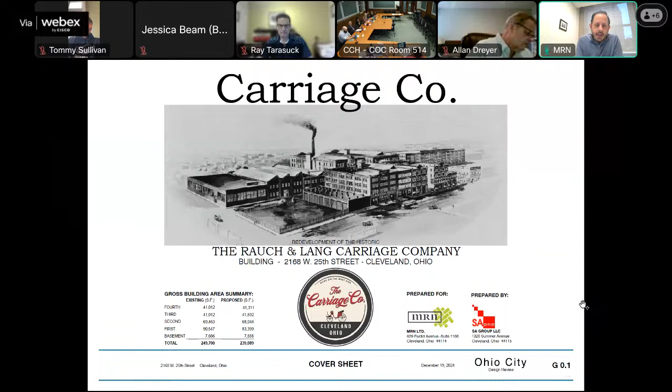Thank you, Jessica. Good morning, everyone. My name is Joe Del Rey. I'm with MRN at 2168 West 25th Street. This is our return visit to look at the windows and doors for the Carriage Company. Earlier in January, we presented the project as a whole, which is our proposed redevelopment of the Rauch and Lang Carriage Company factory located between West 25th and 26th, between Chatham and Monroe.

We have been working closely with the federal and state historic offices. We have been awarded federal and state tax credits, and the project, as designed by SA Group, who is joining me on the call, has been done in a manner to meet the requirements of the historic offices.

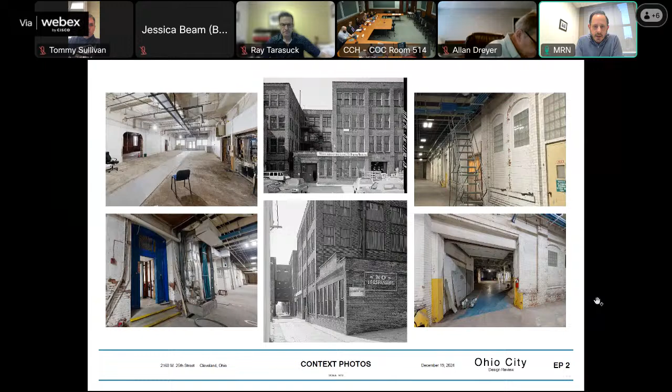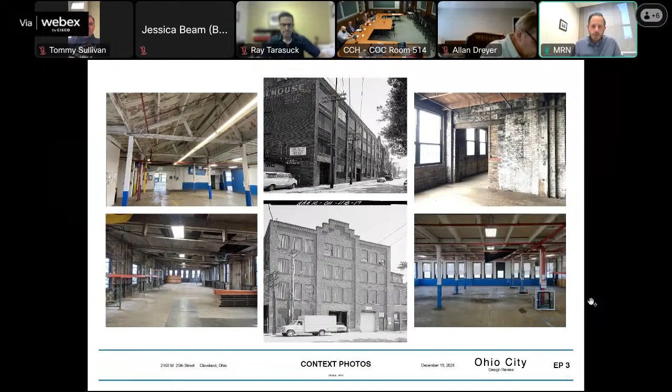Again, as a revisit, I want to include some pictures, both of the existing conditions now and of the historic nature of the buildings. Everything we're doing has been in line with honoring and respecting the historic building facades, window details, and entryways. The board gave us a certificate of appropriateness, I believe, extending to everything but the windows and doors last time, so I wanted to come back and present our plan for window and door replacement as they will occur.

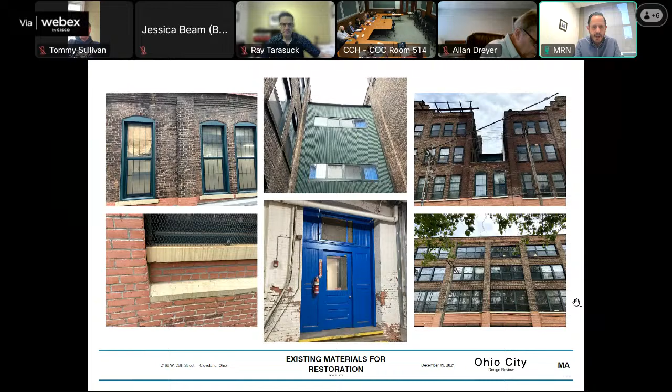One of the big features is, as I mentioned, that we're working with SHPO. We recently, about 6 weeks ago, went back to them with our amendment to the approved plan. This is a presentation that Larry Divita from SA Group put together. Larry, I'm hoping you could briefly touch on the next 4 to 8 slides, talking about the distinction between the blue, the red, and the green highlights, and why they're relevant to the committee presentation today.

Thank you, Joe. Good morning, everyone. So there are 3 colors here. The blue is existing windows, existing today. The red is what was approved by SHPO, and the green is the proposed changes to things.

So if you look at the bottom elevation, the proposed, you'll see that quite a bit of the windows and doors proposed for this project are existing, meaning that we're not touching them. The existing is mostly replacement windows from the early 2000s, and then what we're doing is adding and sort of fixing windows around the project.

On this project, there are over 700 total openings, and basically the replacements for windows is about 75, so roughly 10% of the windows. The majority of the windows facing the 4 public sides, being Chatham, 25th, Monroe, and 26th, are existing to remain at this point.

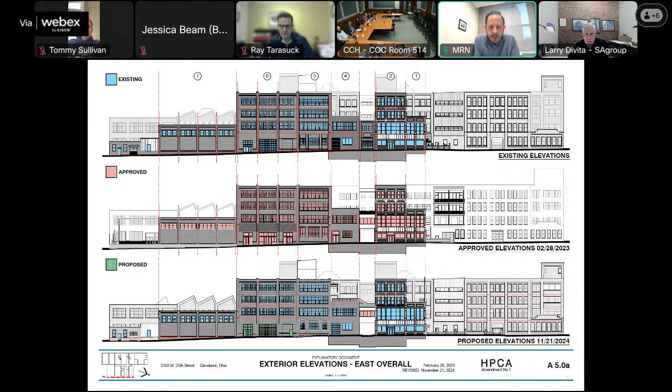So in summary, as we go through these slides, if you see a blue highlight on the elevation — in this case, the West 25th Street elevation of the buildings fronting the street — if it's blue, it's existing to remain. If it's red, it's a window that has been previously approved by the State Historic Preservation Office. And if it's green, it's our way of indicating an opening that had been approved, but we're asking for a change or for them to honor the condition as it is. We'll show those changes as we go through the project here.

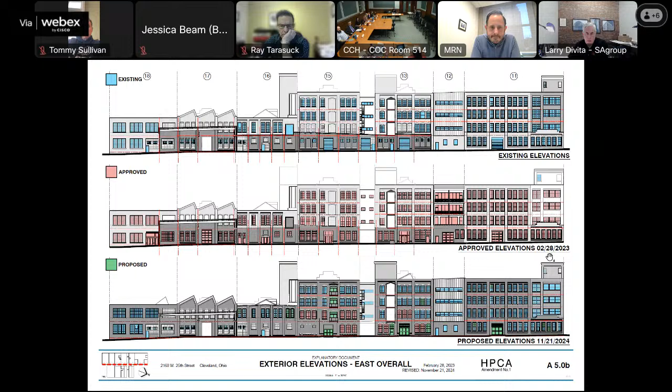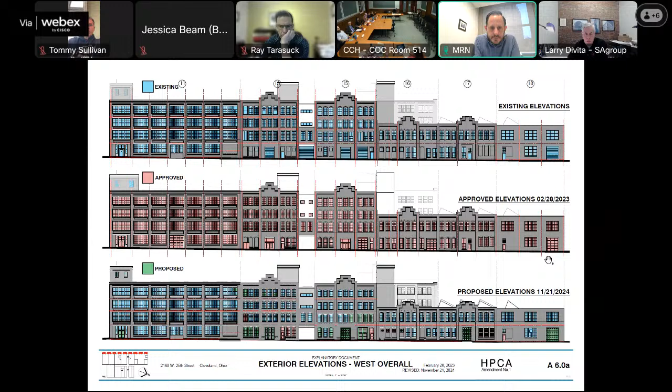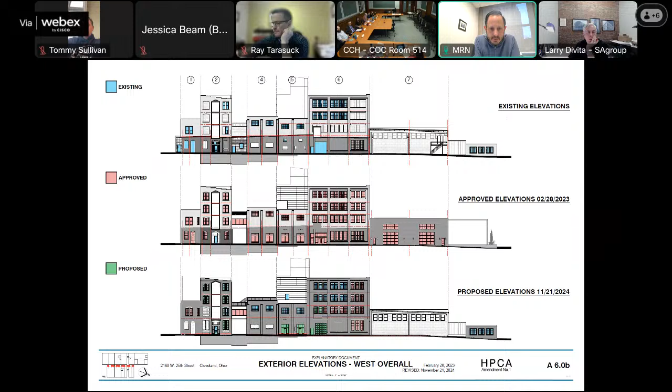This is the view from Monroe. Again, blue indicates existing to remain. Red are approved through SHPO back in 2023. Then we'll show that window in a little bit. If you could advance again.

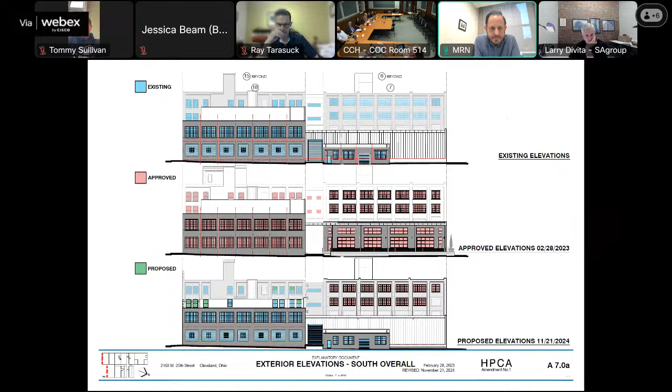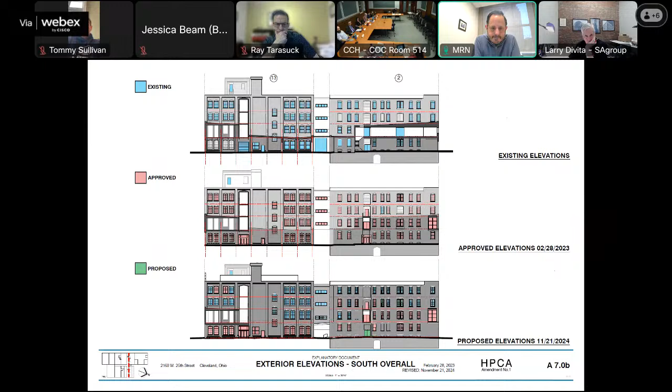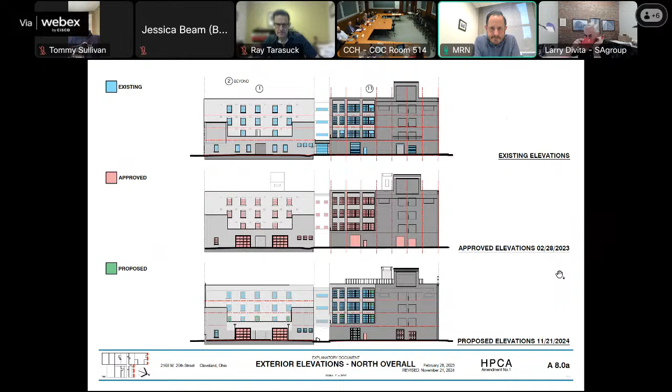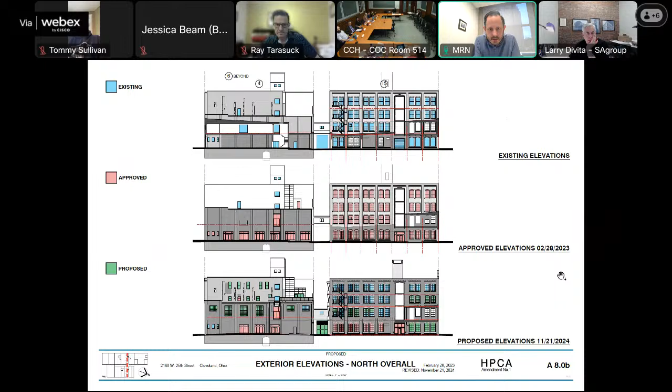Here is our south elevation from the opened up Hancock alleyway. Now we're turning around and facing — I think this is on Chatham here, looking south. This is the north elevation. Sliding in here, this is the alleyway, still looking south, the north elevation from the opened up Hancock.

This next page I included, and Larry, I'm hoping you could speak a little bit about this. This is a page from our submittal to Building and Housing for permit, taken directly out of our submission package, and this speaks to the window types as they are envisioned for when we do need to replace the windows themselves.

Basically what we're looking at is what we've identified as five types of windows. Type 1 is new sashes in existing frames. So in this project, there are some windows that are incomplete — they had insulated metal panels in them for various mechanical reasons, air conditioners, vents, those kinds of things. So basically what we would be doing is replacing just maybe half the window, new sash to match the existing glass.

Type 2 is new windows to match the existing replacement windows that are in the project. That is by far the largest majority of these, where there's an elevation that has quite a few of the existing replacement windows. We are just matching those.

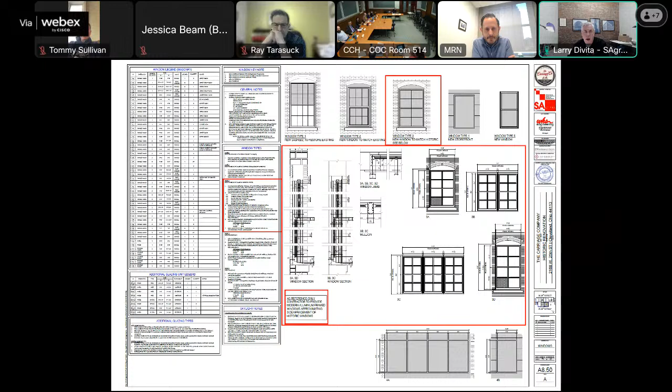Identical windows to match the existing replacement windows. So that you have a uniform appearance on the exterior of the building.

Thank you, Larry. Again, this is the second page of that package, looking at storefront doors as they will engage on the street level.

Just to remind everyone, we're not presenting for the retail today as a part of this initial build. So the only door openings that we will be engaging with are either for our residential lobbies, or for stairwell entrance and exits, as well as for the leasing office.

So what you see at the bottom of this page are the specifications for any doors or doorway entrances that have to be either replaced or maintained.

As we go into the next few slides, I'll be speaking to three chief types of windows, as well as specific door openings, because I think these—as Larry mentioned, there's 5 types of windows. Well, one of them is a sash replacement. So I want to really focus on where we are actually replacing full windows.

So window type 2 is a Traco window to match the existing windows that were replaced. These are the ones from the early 2000s, right, Larry? Correct. So where there is a window on the upper floors that was replaced in the early 2000s, we would be replacing it with that same Traco window to match.

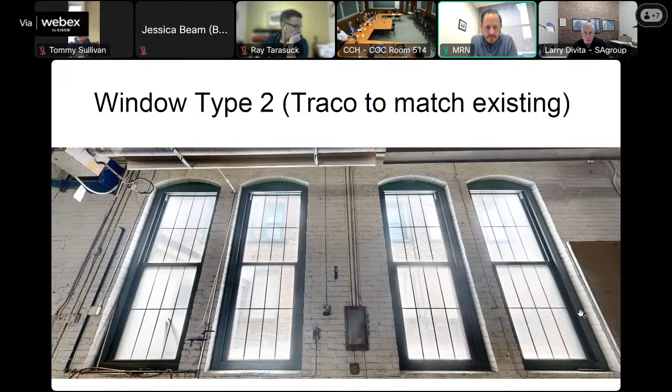This picture at the bottom of the slide is the existing condition. The next slide has the shop drawings. Oh, this is the interior of that same window there. So you can see how they exist both inside and outside. And then as we go through the slides, these are the shop drawings for those windows.

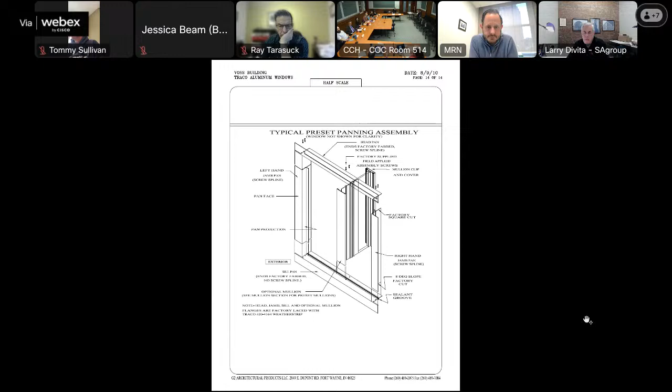So thanks, Carl. So the window type 3, now this is a new window. This is a Wojan window, and this is being proposed for the openings where we have actual historic windows that were not replaced by the owner in the early 2000s. These are a window to match as stipulated by SHPO. And again, these are the shop drawings for that window replacement.

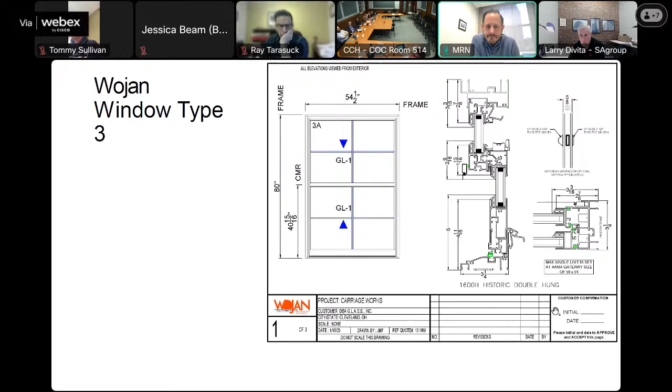Finally, window type 5 is the Kawneer window. These are the windows that we are adding, or where we have to add openings that were not traditionally historic openings. These are the ones that Larry mentioned. We were directed not to try to make it look historic. These are new openings, and so this is a newer window.

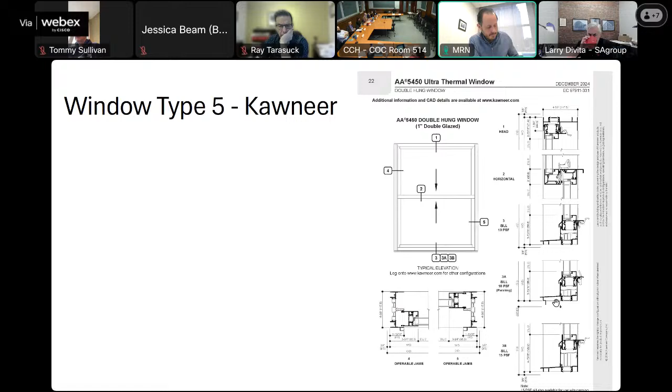In a couple of seconds, I'm going to show everyone where these windows will occur at. And Carl, if you can slide through, these are the shop drawings for that window as well.

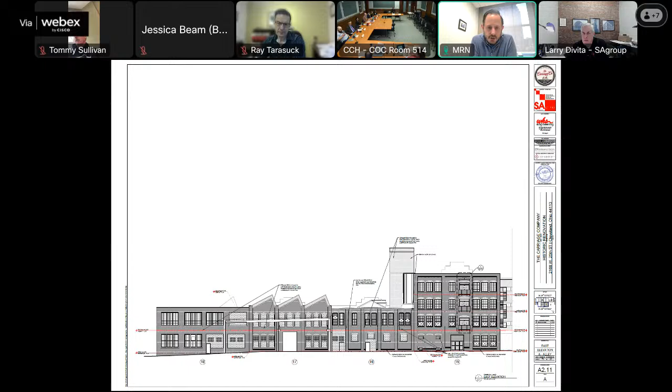All right, so the final few slides of the presentation are going to get into both some boring images and then some more lively images. The next couple slides simply are our demo package, calling out locations where windows will be removed and replaced. This is very similar to the earlier slides that we looked at. Carl, if you could slide through these here.

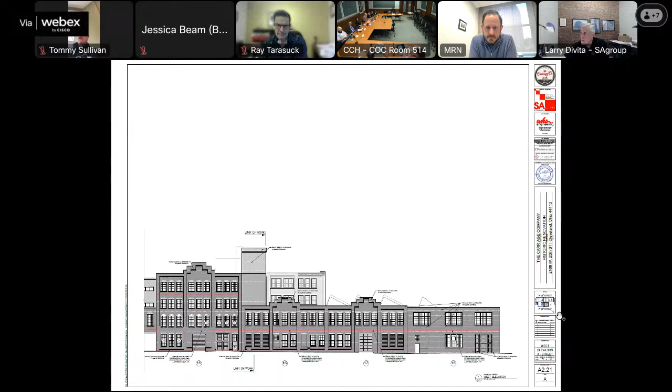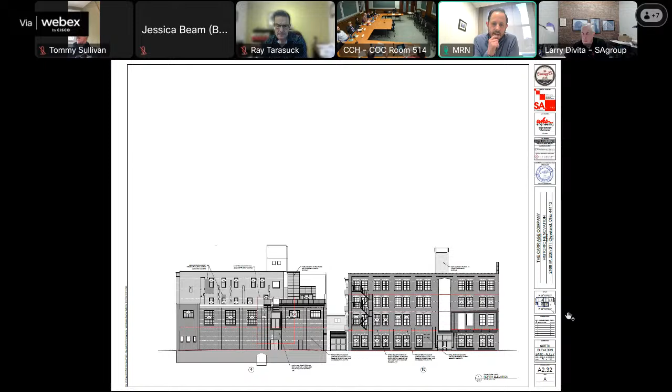If you were blowing this up, you'd be able to see there are indications or lettering in each opening indicating where the windows are being replaced. I thought I would create this slide to better illustrate where these windows are going. The superimposed windows tie back to that slide where we talked about the different window types, and the arrows show where in a blocked up window, for instance, they're being replaced.

In this example, we are looking at the facade of building 15. This is facing the alleyway, yes, you're right Larry, thank you. And then showing where a window type 2, which is that Traco replacement, would be added.

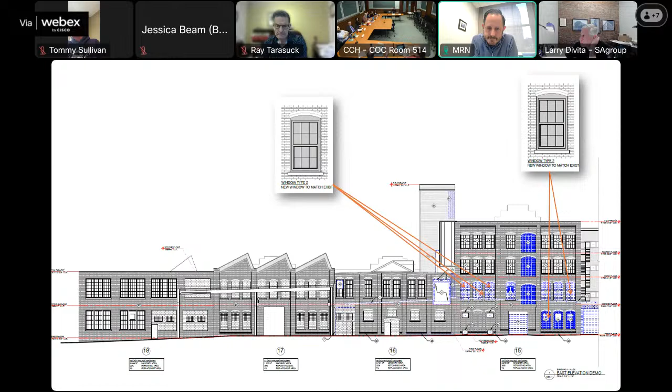Stepping back a little bit, now we are facing, this looks like West 26th, looking at the backs of buildings 15, 16, 17, and 18. There's two different things I want to call your attention to here. One is where we have to create a new opening in building 17. We are going to be putting in a new garage door, so it's a new opening, and we'll be using a door that matches the existing panels. This is what we have presented to SHPO as well. And again, where we are putting in new windows, in this case, they'd match that Traco replacement.

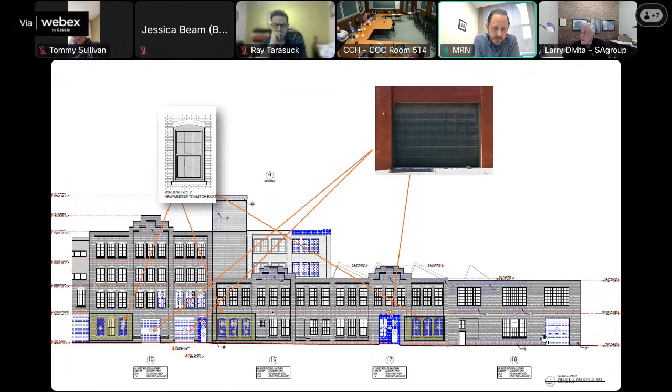This is the image of what's currently there now. You can see where those openings previously existed. They weren't even, the garage doors were not historic matched. You can see also the bricked up windows that we'll be putting the Tracos in, and you can also see that air conditioning unit up above.

Here's another example. If you look at both the first floor, you'll see the bricked in windows that get replaced with a Traco replacement. And then on the second floor, there's an example of a boarded up window. There must have been a piece of mechanical equipment there that would also be replaced with a Traco replacement.

This is looking at the west elevation of 11 and 13 and 14, so we're still on West 25th Street. Again, showing how when we replace a garage door, we're using that paneled look, as well as when we're replacing the windows. This is calling out the Traco windows.

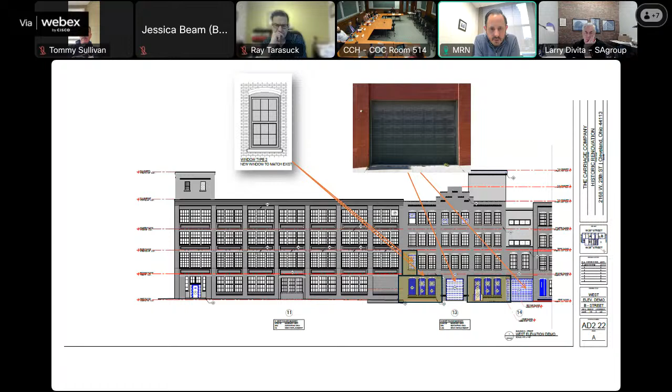Now, where am I at here? This looks like an alley elevation as well, looking east from the alleyway, the opened up alleyway. Again, there's a lot of bricked up windows that will be opening up in this instance. And the next slide should show...

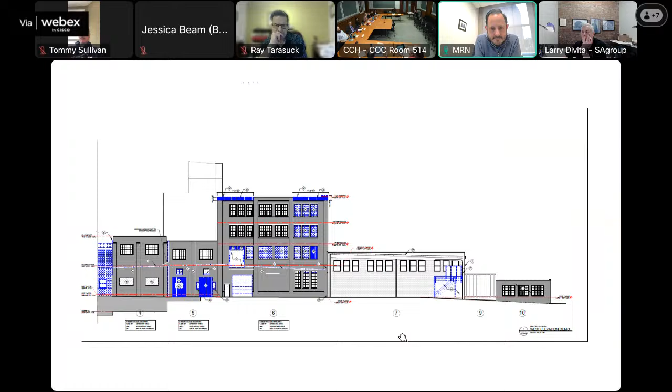How it looks today. This elevation is important because if you can kind of crane your neck a little bit, you'll see along the second floor of that building, there's some mechanical equipment covering openings that we will be creating new openings. So this is where that type 5 window comes in.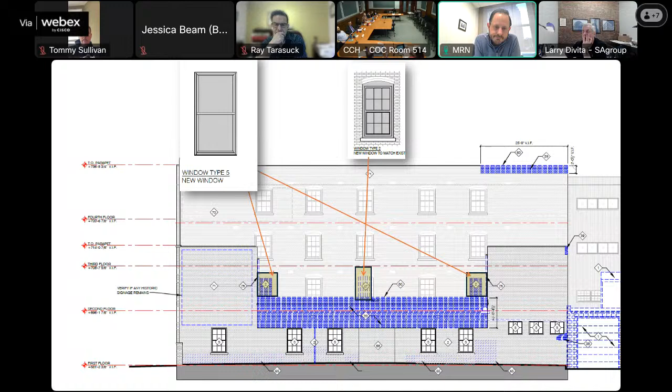Finally, last but not least, this is the elevation looking north. We're looking up 25th Street here from the corner of 25th and Monroe, and you can see all those blocked in, bricked in windows on building, we call it building 6 there. If you go to the next slide, these are where I believe we'll be putting in that type 3 window.

And again, these are windows designed, this is that Wojan window, designed to look like the historic windows. They never replaced them with the Traco because there was no historic template for it or traditional template for it. So in this case, a window that looks like the original design would be placed there.

So, with that, I hope I provided a comprehensive overview of our plan for openings. Thank you for the presentation.

We will then move on to landmark staff recommendations. Staff recommends approval. It's a very thoughtful and thorough presentation. It fills in a lot of the questions that we had on the details. We recommend approval with the understanding that if there are changes as you go through the SHPO final approval, you'll keep us in the loop. And if they're significant, you might have to come back to this body, but hopefully that won't be the case.

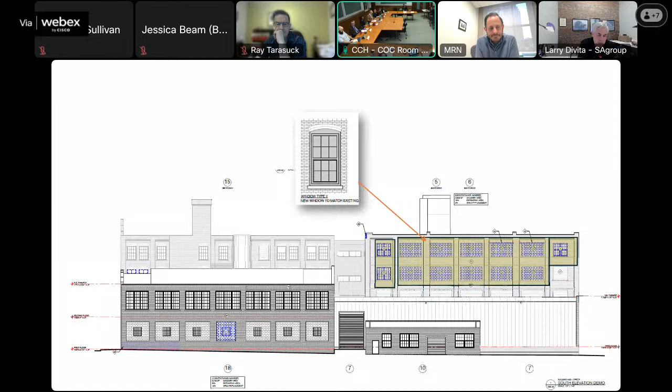Great, thank you. And thank you again for the thoroughness of this presentation. If I had any questions before, I certainly don't have any additional ones now. Thank you. Excellent. Thank you, Mr. Lozier. Other questions and comments? Ms. Anderson?

Thank you, Madam Chair. I recall at the last presentation the body had some questions about the doors. Is there any more information you could share with us about the doorways?

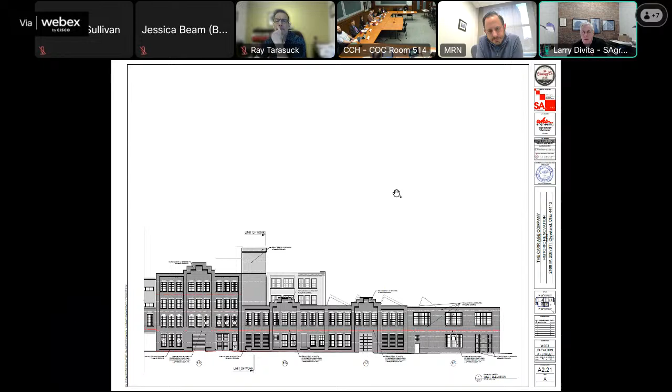Sure. I think about midway through the presentation we showed the architectural diagrams for the doorways. Again, most of the doors, as they engage the first floor, are either garage doors, which will match existing, or for the leasing office, a couple of glass storefront doors. Carl, if you want to scroll back, probably about 20 pages, you'll get some detail on those — it's page 16 in the presentation.

So the intent there is, everything here is aluminum storefront. Doors that were historically panelized, we're proposing to have a 2-panel system within those doors, and new storefront doors would be standard modern storefront doors, so it differentiates from the historic. So you can immediately see this is new, that's old — that's the intent there.

Thank you. Thank you, Ms. Anderson. Other questions and comments from the commission, or would someone like to put forward a motion?

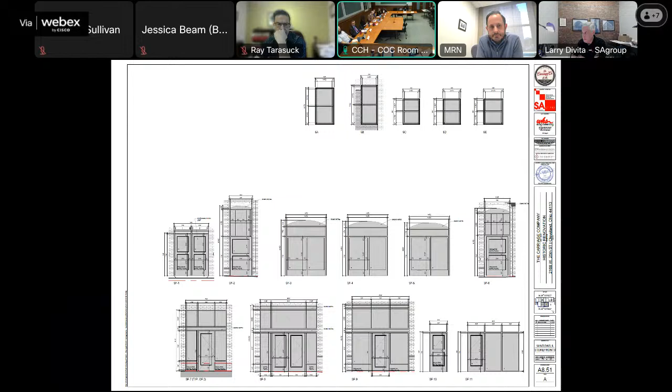Disclosure — I'll make a motion to approve as presented in this presentation. All right, we have a motion. Do we have a second? Second. Thank you, Mr. Samberry. We have a motion and second. Any further discussion?

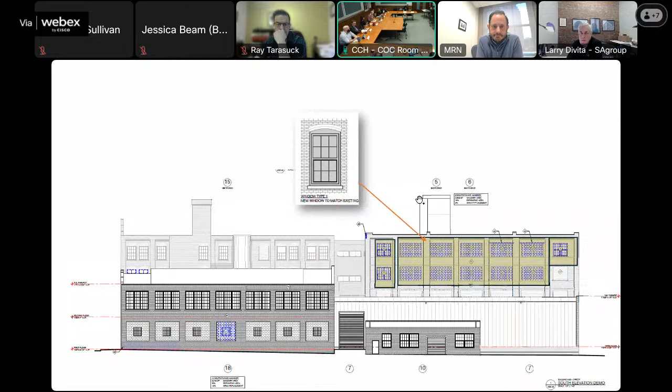Not seeing any, Mr. Mussin, please call roll. Ms. Anderson, yes. Mr. Dreyer, yes. Dulick, yes. Councilmember Gray, yes. Mr. Lozier, yes. Mr. Samberry, yes. Mr. Tarasuck, yes. Dr. Williams, yes. And Ms. Trout, yes. Madam Chair, the motion passes unanimously.

All right, congratulations, we look forward to seeing your project move forward. Thank you, everybody, I appreciate you. Thank you.

We'll now move on to our second applicant, located at 4810 Lorain Avenue, demolition.

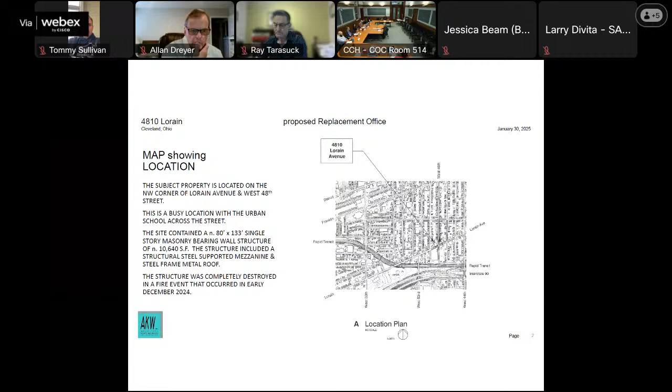This is our map that shows our location at the northwest corner of 48th and Lorain. If you're familiar with the area, it's a very busy intersection with the urban school across the street. The structure was nominally 80 by 133, a single-story masonry bearing wall structure, about a little over 10,000 square feet. It had a steel-supported mezzanine of about 3,900 square feet and a steel frame metal roof. The structure was completely destroyed in that fire on December 8th.

This is a photograph from the internet that showed the conditions prior to the fire. The county lists the building as a one-story building built in 1963, out of fire-resistant framing concrete block, 720 square feet of office, construction class C, usable area 10,480 square feet. It was remodeled in 1971, gable-type roof, that 3,900 square foot mezzanine, forced air heating, slab on grade, condition average, and composition roofing.

This is the condition of the structure as it exists today, resultant of the fire in December. That's the south elevation facing Lorain. Apparently there was a smaller historic structure encapsulated by the larger masonry structure, I presume in '63. We did not look at the fire Sanborn maps yet to see what that footprint was.

Some staff did venture into the structure, and there might be some photographs that we can share of that. I myself did not go in.

This should be the east elevation, which is the long dimension facing West 48th Street, set back on the property with the car sales lot in front of it. This should be the north elevation. There were 2 garage doors there, you'll see the detail of those as we continue forward. And this should be the portion of the west elevation that you see that protrudes to the north of the adjacent 2-story masonry building.

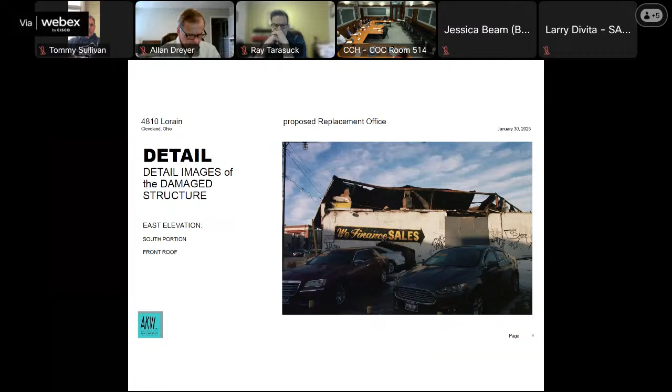This should be the detail of the fire, so that's the south portion. There's a recessed entry and a stoop there that might give us an opportunity in the rework of the project. Detail of the front portion, the boarded up plywood, back past where the sales arrow points is where the office entry was.

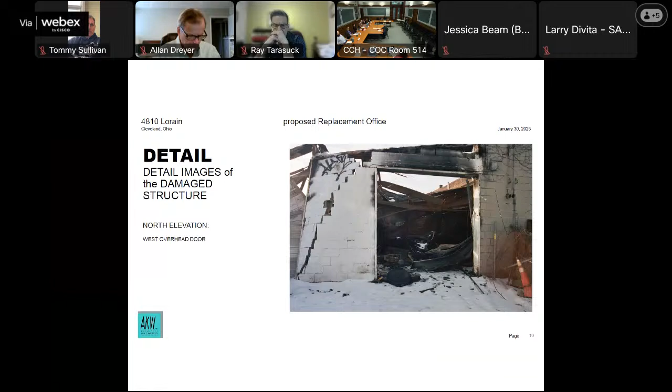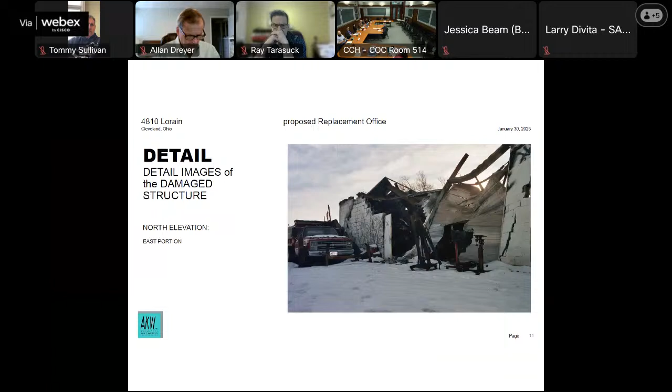This should be the picture of the garage door on the north elevation to the west and to the east. Good demonstration of plastic state of steel under fire conditions.

This is our parcel, it's actually 2 parcels. There's a small sliver of a parcel that's along that northern boundary. 48th Street to the right, and Lorain to the bottom of the page.

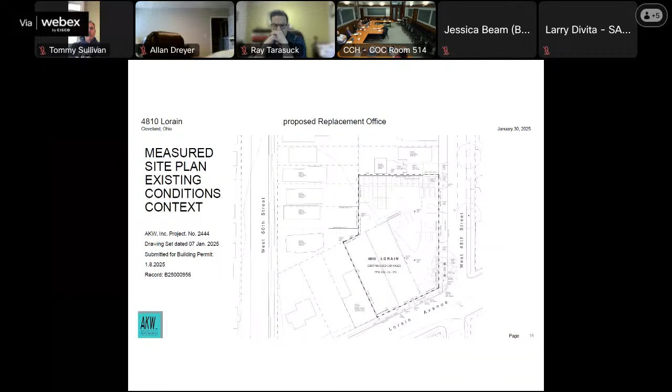This was our selective demolition plan. To clear the site, we're going to retain the slab on grade, at least for the moment, and work from there. So we're here today. We submitted for permit at the beginning of January, which led us to this meeting. We're going to ask that we be allowed to go ahead with the demolition so that we can clear the site.

The city demolition people had already called us, receiving several complaints from the neighborhood about the site. So if possible, that would advance our project that way.

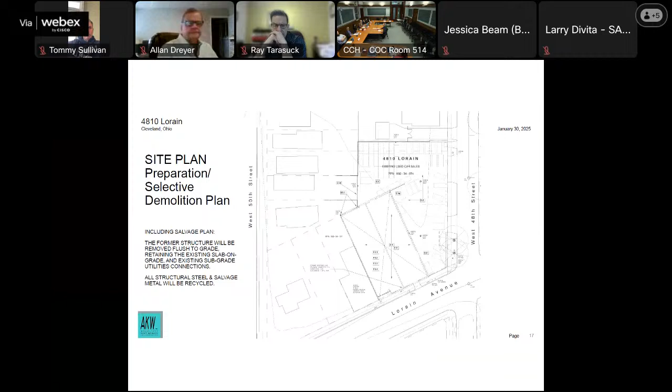We met with the advisory committee last Thursday. We had walked through the site with them the prior Tuesday, which is where the site photographs of the interior came from. We will meet again with staff and the advisory committee next Thursday to continue advancing our proposal for the replacement.

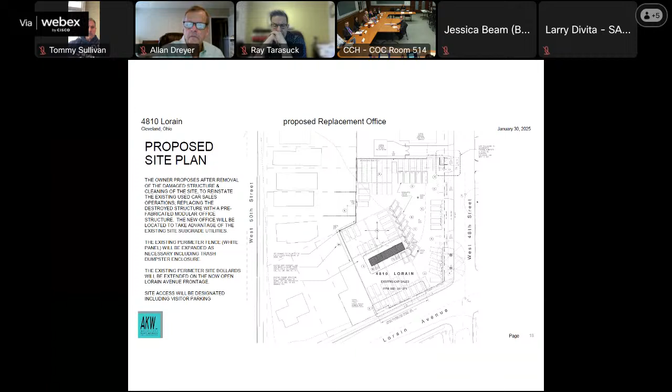Tommy Sullivan is our owner client, he is with us on the call. I think that's all I have for the moment.

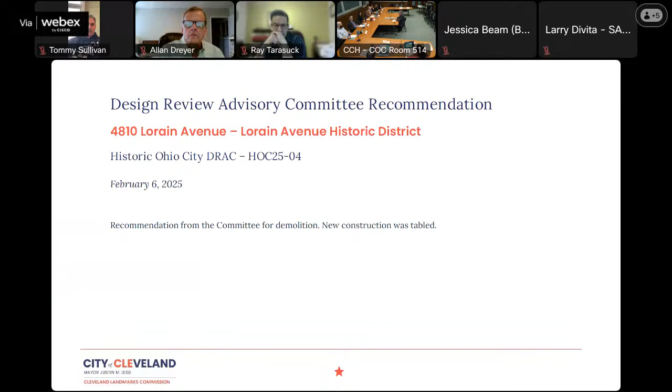All right, thank you for that summary. And Commission staff, Landmark staff recommendation. Thank you, Madam Chair. As noted, we did have a site visit on February 4th. Myself and one of the Historic Ohio City Committee members walked through the structure with the owner, which was an experience.

So per our usual process, we have a bit of history of the building. As Mr. Weaver noted, there is a smaller historic building encapsulated within the existing structure. It was originally, from the Sanborn maps, 3 separate parcels with 2 frame buildings and a masonry building at the corner. The masonry building at the corner dated to around the 1880s and was demolished or disappeared around the 50s or 60s. The current building is a 1909 building with a 1963 addition to fill the parcel to the west and expand and add height.

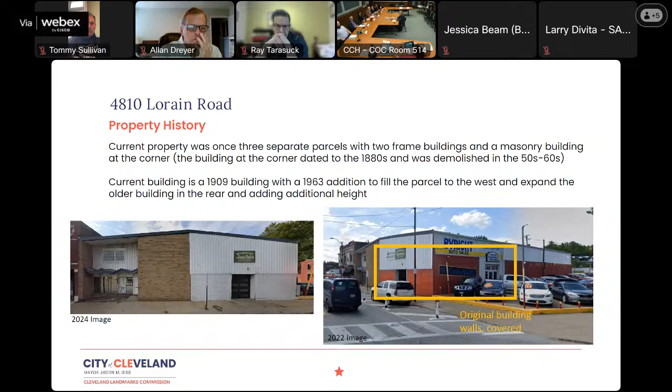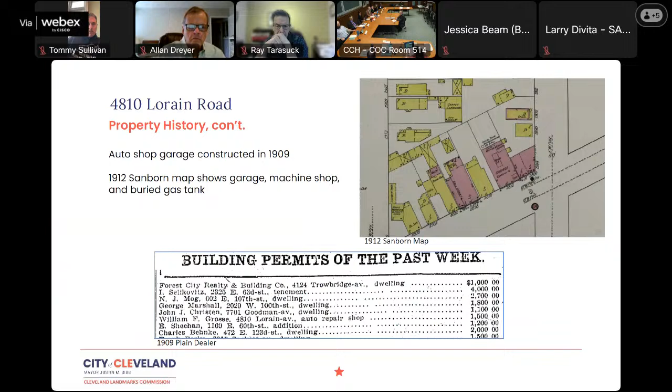The little picture shows about where the footprint of the original building is, and you can see how much it expanded in the 60s. There's a little map showing the building, and in the newspaper in 1909, it pops up as a building permit for an auto repair shop. It's had that use since it was constructed. Prior to the auto shop, there appeared to be a cigar shop or cigar factory there, but it's been an auto shop use for most of the time since 1909. One thing to note is the 1912 Sanborn map shows a buried gas tank on the property, just noted on the map. I also found an ad for the original auto repair, the West Side Auto Repair Company.

It was an auto shop or garage use until 1928 when Becker Roofing Company moved in, and it stayed with the roofing company until the 1960s when a new business, Sprockets and Gears, began using the space. That aligns to when it was expanded for the much larger use, and at that time the corner building is gone, so they have full use of that space. In 1991, Buggies Unlimited moved in, and it's been continued use since then for auto sales and repair. As noted, it was thoroughly damaged by a fire in December of 2024.

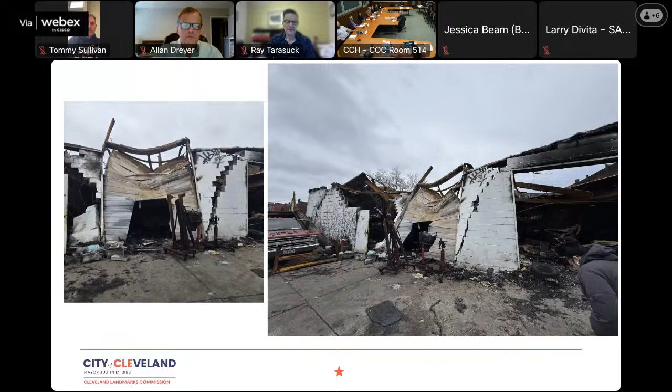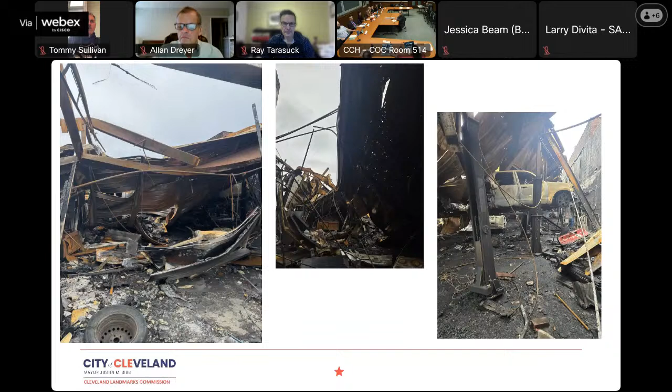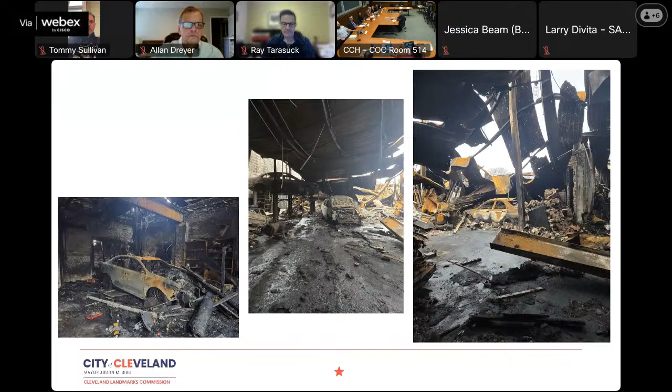Here are some pictures from the site visit, both interior and exterior. It's definitely an interesting building. We had a good number of the committee join us for that site visit. Most of it is CMU walls. These are some of the interior pictures where the steel has just warped and collapsed. One of the major I-beams that was a support through the building is just on the ground.

In general, staff aligns with the local committee in support of the demolition. Even with the hidden interior historic building, all that remains is pretty much just the walls. So regretfully, sad to see a building go down, but in this case there's just walls and some steel left.

Thank you for that summary and the photography inside and out. Yeah, that's fun. It was fun. We'll now open up the floor to the commission for any questions and comments.

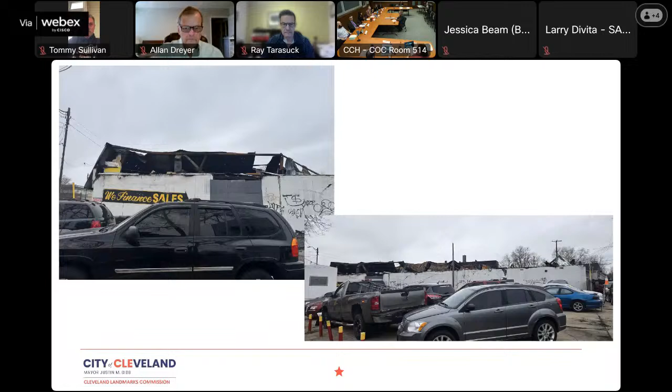Overall, I would agree with the summary, the presentation, and staff's recommendations. It looks like it's a total loss, and for public safety I would also support the removal of the building, and then working with staff for the replacement building in the near future.

Any other questions or comments? Would someone like to make a motion? Ms. Anderson? I move to approve as presented.

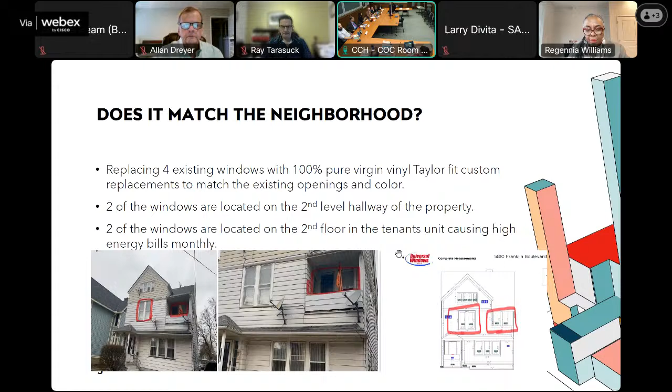I'm sorry, please proceed if you have anything else. Yeah, so I think where we left it off last month is you wanted me to bring it in, make sure that it's the window we're saying it is, right? You guys wanted to see that physical model, so moving forward you fully understand exactly what we'd be putting in. I understand where you're coming from with the vinyl windows, but there are a few different types when it comes to that technology, where we can actually do a tear-out that slims down that frame on the outside.

All right, thank you for the presentation. We'll then move on to Landmark staff recommendations.

Right, thank you, Madam Chair. As Josh mentioned, he did come into the office earlier this week to bring in the window sample as requested by the commission at our last meeting, to talk through its attributes. Staff is appreciative that it's not the classic insert, but actually fits into the jamb as opposed to just fitting into the opening.

So I think my biggest note would be an acknowledgement that if you approve this window, we would approve it for the entire house, or at least the entire front of the house. Since these are just half of the windows on the front, if the owner wants to change the other half at some point, we'd like them to be consistent and not have to go through a whole process again.

So I think even though only 4 windows are being proposed today, if you justify why you're making the approval, I think also including that you'd be approving these for the entire front of the house would be helpful.

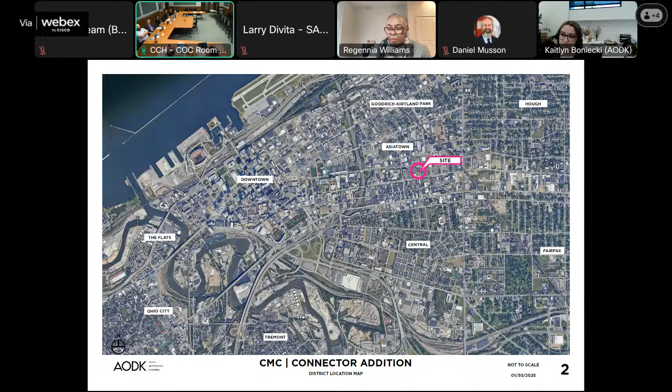For context, the Children's Museum has frontage along both Chester and Euclid, with the Euclid corridor being the main entrance and kind of the money shot of the building. Want to highlight a couple areas where we're targeting our work.

The annex, which is where Adventure City, the big playground, is kind of attached, is where that outlined pink arrow is pointing. And then the historic mansion is where the solid arrow is, which we are not proposing any work there.

I want to reiterate that all guests will be coming in the front door, regardless of what work we do towards the rear. That will not be an entrance to service the museum.

So our two areas of interest are where that pink outline arrow is, which we're calling the rear connector, and then the service addition would be going where the existing dumpster enclosure is, which is to the left side of the annex building.

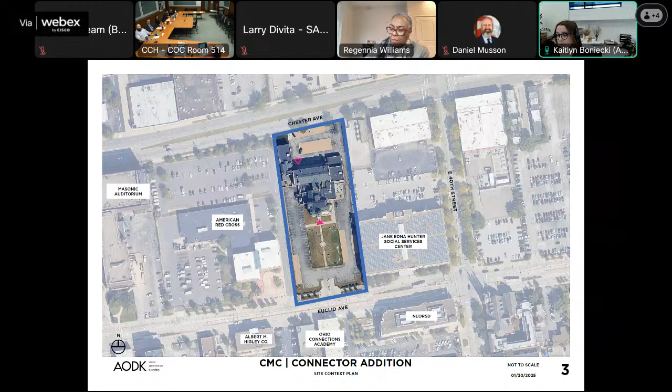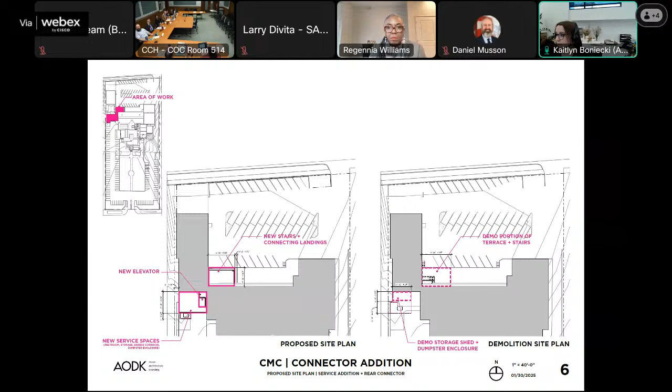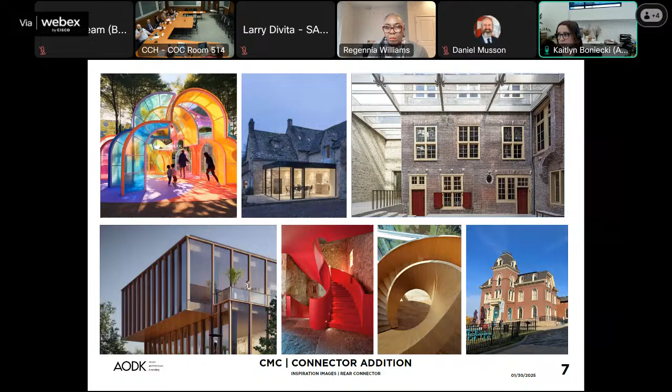Now let's walk through some floor plans. I'll go over these briefly since they haven't changed much since we last came before you. One note from Landmarks was to either step the building back or forward along the rear side toward Chester, to keep it in front of or behind the existing line of the terrace. We compromised by providing a planter to buffer the building and the parking lot while still maintaining those important parking spaces, so the rear connector piece steps back as it goes up.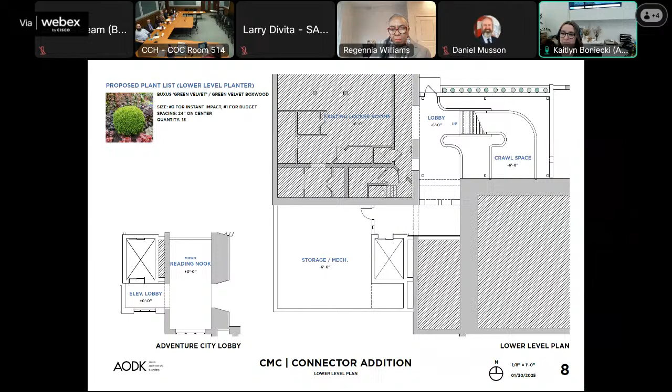This is showing what would be on level with the existing squash court — we're 4 feet above that parking lot at this point. This is where we'd be flush, with the squash court, the overlook, the storage, and the elevator all on one landing. We'd have a small drop down to Adventure City to accommodate the front and rear opening, so that all levels of this corner are accessible.

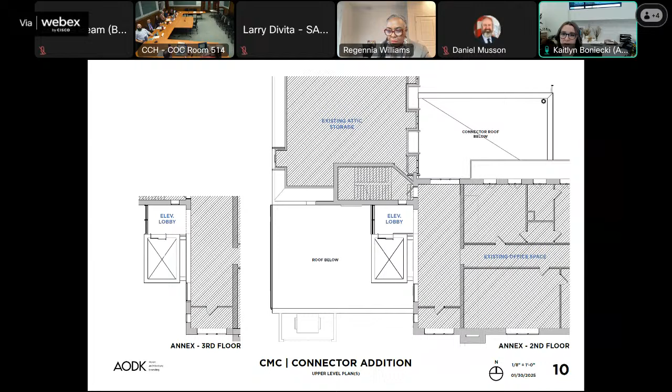This is showing the roof situation. The connector roof sits below the catwalk, so we're not infringing on that in any way. The service addition shows the elevator lobby tucked against that building, so you wouldn't see it as it goes up. That roof is held down, basically on plane with the existing lean-to shed roof, so it doesn't intersect with the building moving upward.

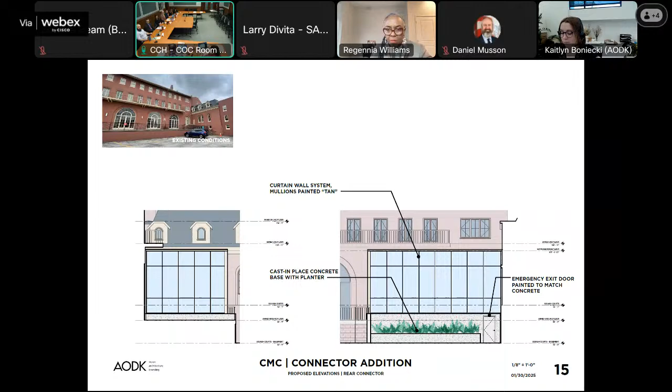And then on the other side where you have the curtain wall system, are the original windows going to remain in the original wall behind that, or are they going to be removed? On this rear piece? No, back on the other side. Oh, the windows on the north end, or the left side. Yeah, those would be removed because we need to punch an opening through there to allow for access into that elevator vestibule. So basically we'd be removing about 1.5 windows on that side and then underneath cutting out a new opening.

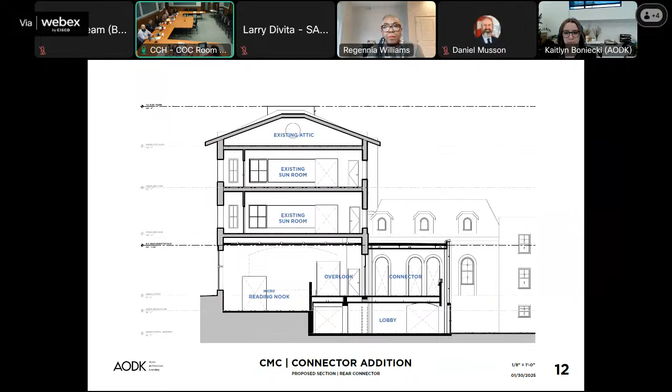In this section, I forget what slide, maybe slide 12, shows generally what we're thinking on the interior side. If you go back one. Yeah, that entire gang of windows on all floors will be removed, all but the one on the far end, yes. But we will have the glass vestibule to let light into that space, yes.

And then I guess my other comment would be, I think it would be helpful to see an interior rendering of the micro reading nook now.

Okay, to understand where the elevation changes have happened - I'm pretty familiar with the space, I take my kids there a lot. So that space is dropping down 4 feet, correct? It will essentially be split in half, with one half at grade with Adventure City and the other in plane with the squash court. So you're losing one of those iconic stairs, but retaining one. Yes, we're retaining the stairs that go through the arched openings on either side of the fireplace. We're adding about 2 risers to accommodate the level change, and removing the other to level out the floor there.

I think it would be helpful to understand what's happening there a little bit better, but you are retaining half those stairs. So I'm okay with this, I think it would just be helpful to have a little more detail there.

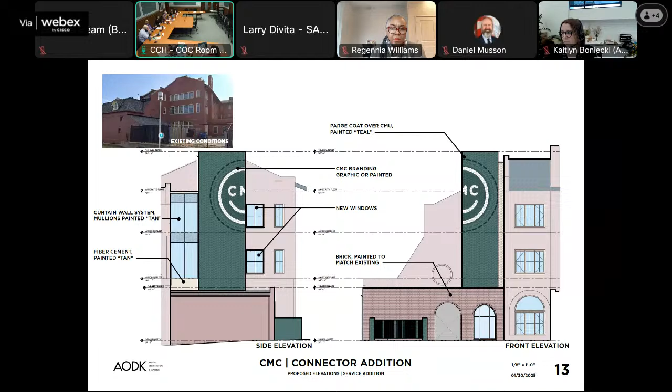As far as the addition off the north, I like the simplicity of that addition and how it, once again, is understated and lets you see the architecture beyond. So I'm in support of both proposals.

Any other questions or comments from the commission? Yes, Madam Chair, I'd like to say something - I would like to come and do a tour of the building, I've never been in there before, to compare what it looked like and what you want to do with it, just to understand the architectural design and what the experts here at the table see that I don't see. So can I come anytime, or should I plan a date?

I think the museum's open every day except Thursday. I've never had a tour with a landmarks commission, so I'm sure we could schedule that with the executive director. Be happy to. Okay, thank you.

Excellent, not seeing any additional questions or comments. Does the applicant feel like you've received enough feedback from the commission to continue the development of your design?

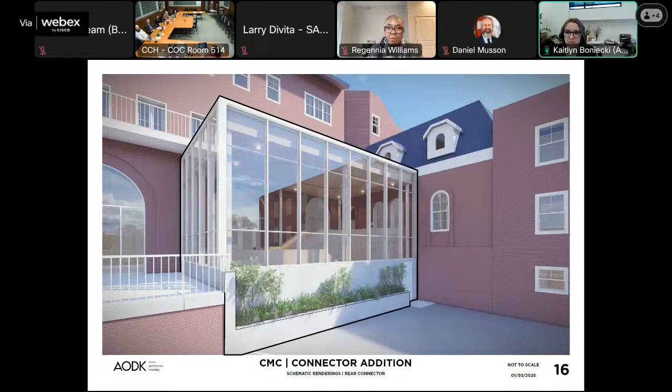I think so from my end. I don't know if anyone else is on from our group - I see Maria and the architect, John, I don't know if either of you have anything. I think the feedback was fantastic today, I really appreciate it. All right, excellent. Well, then we look forward to seeing you come back with your final proposal. Great, thank you. All right, thank you.

That concludes our schematic plan reviews. We'll then move on to landmark nominations.

Thank you, Madam Chair. This is the landmark nomination for the Kamm's Corners Bank Building, former Cleveland Trust Company, West Park Branch, in Kamm's Corners on Lorain Avenue. It is located at the northeast corner of Lorain Avenue and Rocky River Drive in said Kamm's Corners.

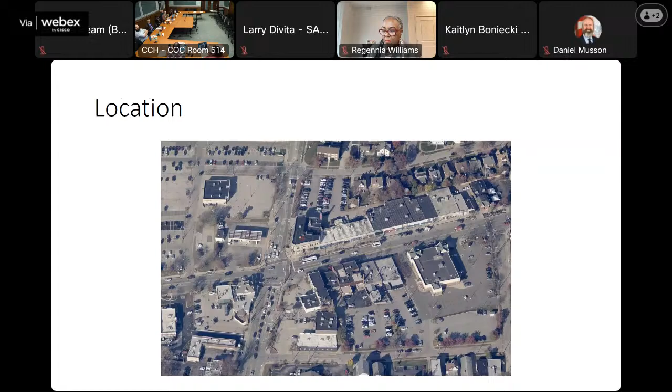Cleveland Trust Company had its origins as a planned safety deposit box company in 1893. While this venture did not work out, in 1894 state laws were modified, with a push from Cleveland industrialist Marcus A. Hanna among others, to make it easier to form trust companies, so long as they kept those activities separate from safety deposit and banking activities. It was with these rules in place that the Cleveland Trust Company was formed.

Taking residence in the newly built Garfield Building, the bank officially opened in September 1895. The banking business took over a portion of the first floor later in 1898, while the trust business and the safety deposit vaults remained in the basement.

After a merger with the Western Reserve Trust Company, the main banking room moved down the street to the corner of Euclid Avenue at Public Square in the Williamson Building. The Garfield Building remained as the women's banking branch.

The acquisition of the Windermere Savings Bank was the first of many, as they were the first local bank to have branch locations. This is still early in branch banking in the history of the United States, and they looked to expand to have a branch in every neighborhood.

The new office opened at Euclid and East 9th Street on January 1st, 1908. Additional smaller banks were acquired, and by mid-1920 there were 23 total branches.

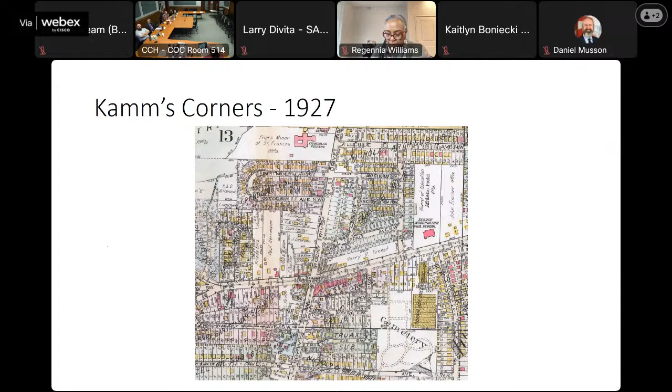The West Park Savings and Banking Company was formed in 1915. The bank was located on the north side of Lorain, just west of Rocky River Drive, approximately where the RTA shelter is located today. Cleveland Trust Company acquired the bank in late June 1920, establishing its 24th branch, although some sources will say it's the 25th, with two here in Cleveland Heights at about the same time.

The Cleveland Trust Company was continuing to grow, and by 1926 there were 52 branches. The prominent location in the growing community was ideal. Three buildings were razed prior to the work being started.

The building was designed by Alfred G. Hall, who was the in-house architect for the company for over a decade. He designed a number of renovation projects for the company and new buildings in Bedford, Cleveland Heights, Painesville, and Lakewood.

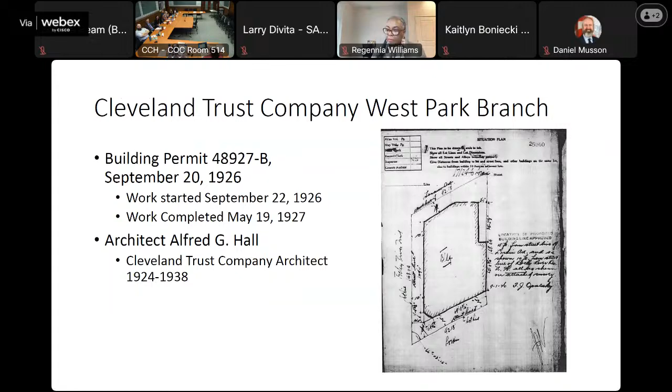The building is significant architecturally as an example of a neoclassic commercial structure. This was an important style for banks at the time, which implied both stability and strength. The building opened on June 11th, 1927, and by the end of that year there were 57 branches.

The building is constructed of limestone. Ionic columns flank the central entrance on Lorain Avenue. Simple classic piers separate the bays, and a centralized classicized parapet rises above the entrance. A rear addition, likely for drive-through banking, was added in 1960.

By 1977 there were 120 branches and $5 billion in assets. The name of the corporation was changed to Ameritrust in 1979, and the parapet was altered to remove the Cleveland Trust name. The building was restored in 1998 as part of the city's storefront renovation program.

The O.B. McClintock Company clock is not original to the building. The O.B. McClintock Company was the successor to the McClintock Loomis Company and produced bank clocks of this nature from 1917 to 1949. It was previously installed on the First National Bank of Gettysburg in about 1926.